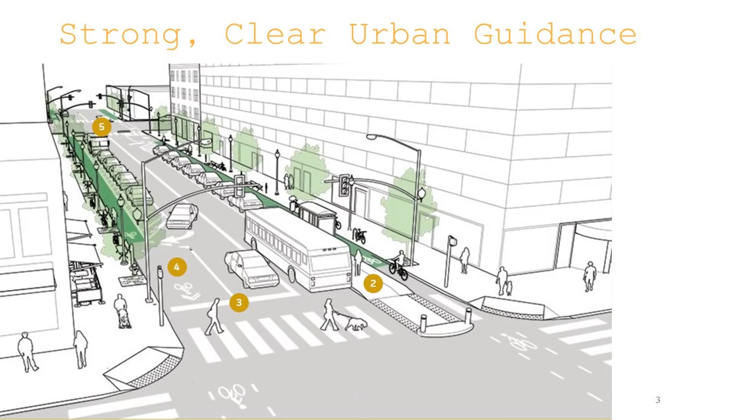You heard Steve mention that part of the focus of this guide was looking at guidance for places that aren't as well covered in some of the other guides you have available. For example, the NACTO guide provides really fantastic guidance for urban places and central cities with density and a big mix of things, but guidance for more suburban kinds of places is harder to find.

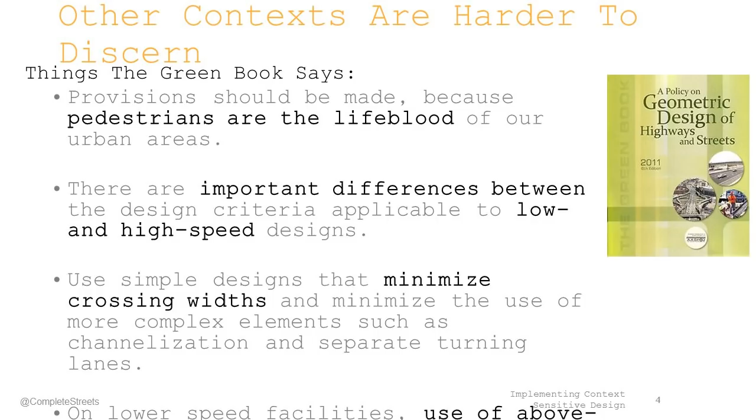There's really good stuff in the AASHTO Green Book if you know where to look for it. The problem is that book is really big and thick, and finding those gems you can use in more suburban places is difficult for people who don't spend a lot of time with their heads in that book. This is important because these suburban places make up big parts even of our central cities.

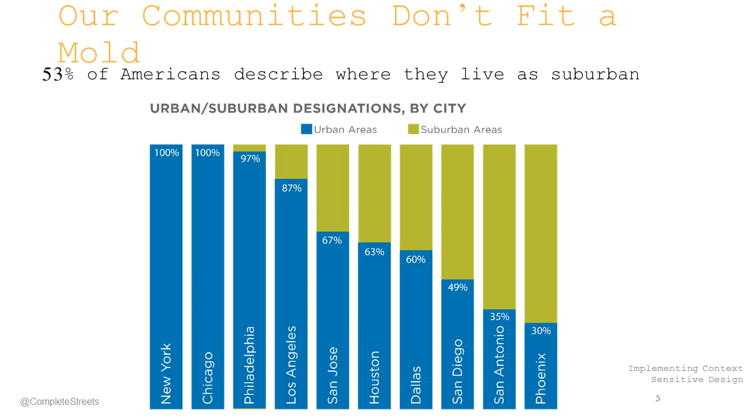This is a list of cities and how people in those cities actually describe the area where they live. You see places like Houston, Dallas, or San Diego, big cities where 30 to 50% is made up of places people describe as suburban, with basically suburban form. Even in a very urban place like Los Angeles, where I live, you can see a lot of the greens representing those suburban forms that are part of what even planners in cities are working with.

Part of what we did in the manual is break down the design process into two basic phases. If you take these basic design steps, the first activities are really pre-design activities, and we felt it was important to pull these out because many of you in design know that decisions made up front drive a lot of what occurs at the end. Oftentimes people aren't as engaged in these pre-design phases, but this really does make a big difference in how things turn out.

So we did spend some time talking about those pre-design activities and the things that were important to think through.

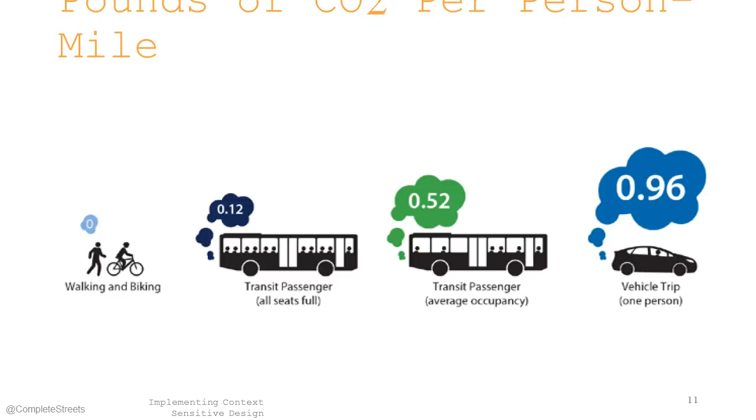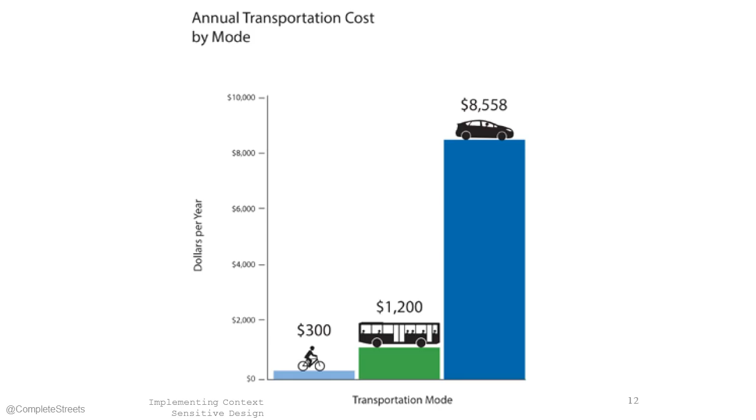Some of the things we know are important for cities, like greenhouse gases and air quality, are largely impacted by transportation decisions. The costs individuals incur isn't always the thing we're looking at—sometimes we just look at the public cost of a project—but the cost to individuals is an important consideration that should be part of the pre-planning phases of projects.

The recognition that the mere act of building roadways is going to induce travel and cause downstream impacts is important. We know that planning without considering those things has gotten us the exact opposite of what we said we wanted: more vehicle miles of travel, longer commute times, less transit ridership—generally the opposite of what most communities say they want to achieve with transportation. We also have health impacts from less active lifestyles.

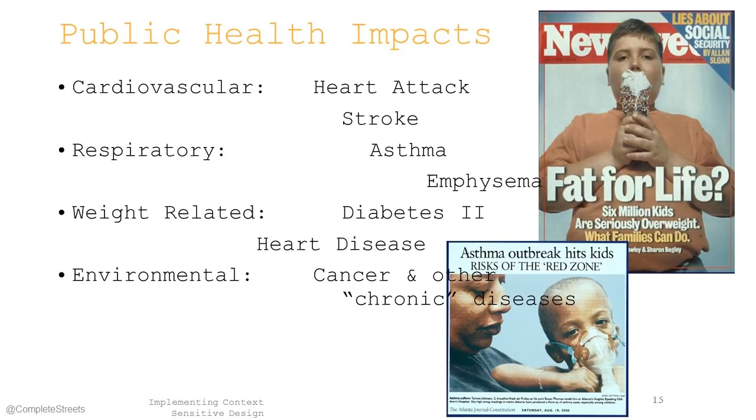We wanted to go into some of those pre-design decisions that affect those outcomes and should have a wider group of engagement. One of those is the assumed traffic growth rate. It's pretty common to just say, let's assume car traffic will grow 1% or 2%, but sometimes that doesn't match up to what's really been happening.

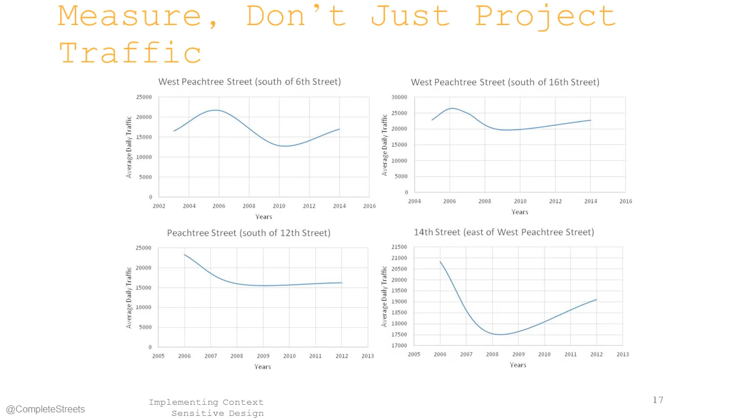So having a bit of a backwards look to check that forward look can be important. This is magnified depending on what sort of planning horizon you look at. If you assume some traffic growth rate and do it over a 20 or even 30-year period, you get that magical compound interest effect.

The idea that a small growth rate compounded over a long period of time ends up doubling your traffic over a 20-year period, effectively precluding anything that's not automobile-based in terms of decision making, which isn't the flexibility that most cities are looking for as they talk about trade-offs and how they use space.

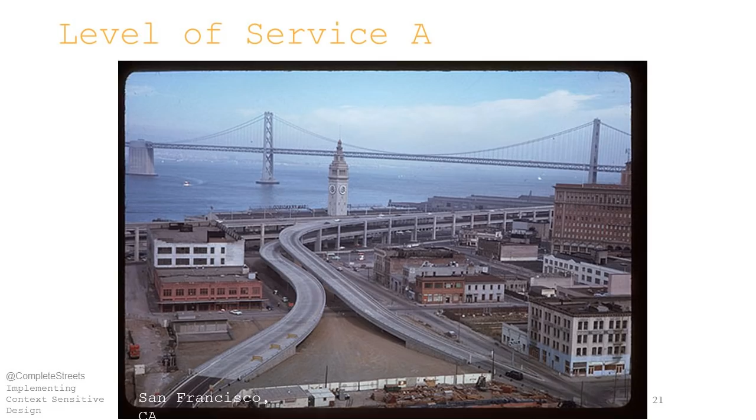And then finally, spending some time talking about what success for a community would look like. Focusing solely on traffic level of service, as we've done for a lot of time, a diagram like this may please the traffic engineers who want this level of service A, but the same street at level of service F actually represents a real success for economic development and probably urban design and lots of other measures.

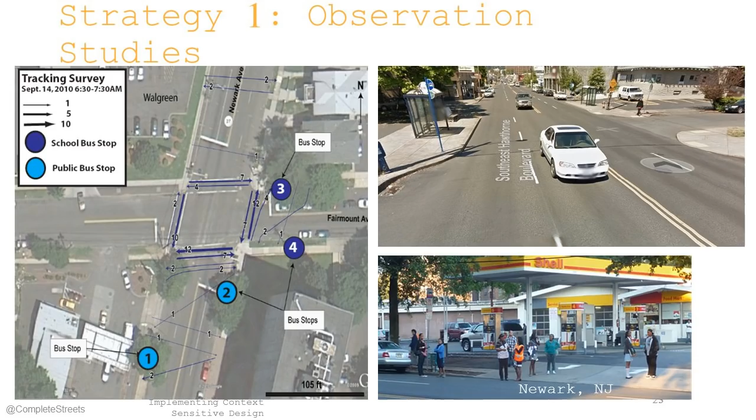A couple of the strategies we talk about in the guide. One is actually getting out and taking a look at what you're looking at. This is a bus stop study in New Jersey, and the data didn't really tell you what the issues people were talking about here. The bottom right, you can actually see what part of the problem with this location was, which was you were asking people to stand and wait for the bus in a gas station parking lot. So some things don't pop from the numbers. Some things have to be observed.

Another strategy is actually letting your data cross-check. A lot of Vision Zero programs do a really great job of taking data that we have plenty of in most places, crash data, and cross-checking with other social factors like poverty and transit ridership and things we know are interrelated. Using that data to cross-check can help daylight a lot of community goals and potentially drive towards different solutions than just singularly focused automobile metrics can.

And then lastly, thinking a little bit longer term—this is becoming even more important as technology is changing most of what we do—but thinking about who we're planning for, whether that's an aging population or a younger population whose behaviors are different than what we've seen in the past, such as the lower rates of driver's licensing among younger people. Being realistic about funding, just recognizing that the days of 80% federal matches are probably gone, and that we have to be smarter about infrastructure dollars to make them stretch further and manage the infrastructure we already have. And then understanding that as technology changes, we just need to be prepared and be nimble.

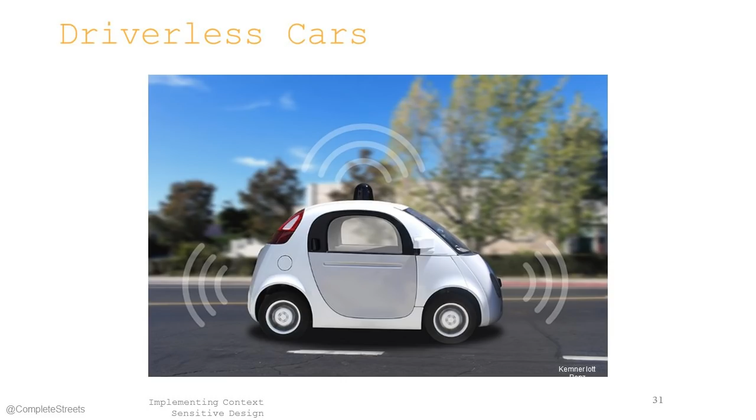We don't know exactly what's coming or when it's coming, but understanding that as people more and more use their devices as a way to navigate mobility, the curb space is really going to be the new frontier, whether you're thinking about scooters or autonomous and shared vehicles that are dropping off. Having some triggers and flexibility built in around how this curb space is managed is going to be as critical for cities going forward as thinking about car movement may have been in the past.

We broke the technical chapters of the manual into areas and ideas that we felt were more in line with what practitioners were needing. So, in other words, getting a question from elected officials or a partner agency about how you're going to accommodate the new regional transit plan on your streets might be one question that you get. Or how do we deal with speeding on this road? Or a pedestrian has gotten hurt crossing this street—what can we do about it? So we tried to break these chapters up around those questions.

The first of those, as you heard Steve allude to, is around these kinds of modal networks—transit, walking, biking—and how that integrates into street design. A lot of this, as most of you probably know, is about trade-offs. There's not enough street right-of-way to do all the things that we'd like it to do, and a lot of these things actually compete with each other.

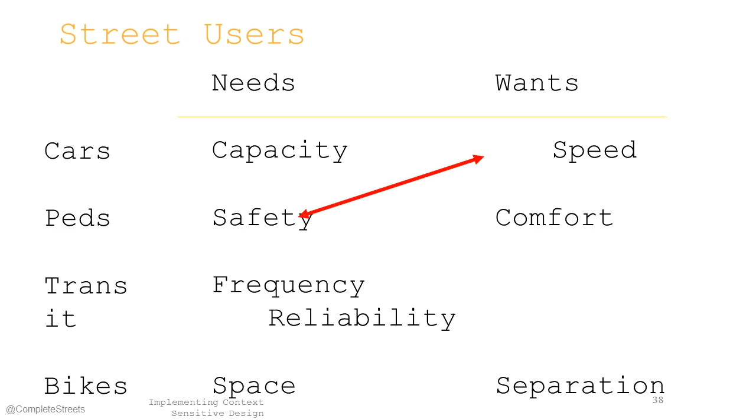There are a few primary trade-off drivers that we talked about. One is mobility function, one is modal emphasis, and one is context. I'll walk through a bit of those.

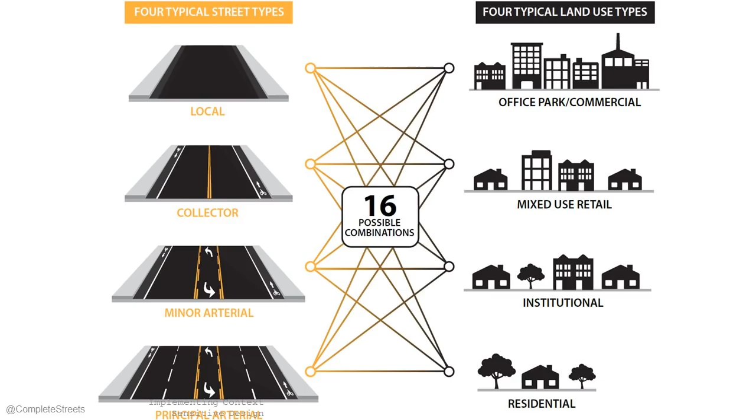The mobility function—thinking about the transportation function of the street, as you see here on the left—and the context that street is serving, this is really how you define street typologies. It's a bit broad to put it this way, but the transportation function of the street will largely drive what's happening between the curbs: how you're assigning the lanes, whether you have parking, whether you have protected bike facilities. Those are a function of the transportation systems you're trying to serve. The context—specifically the density and ground floor land use—very much drives what's happening behind the curbs. Understanding both of these is a key part of how you start to put things together.

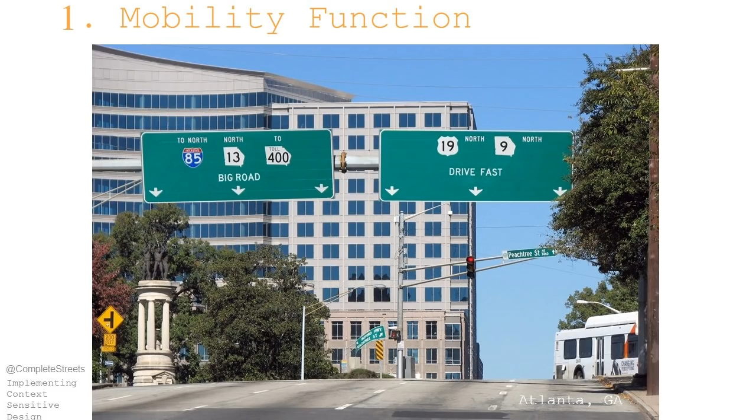Understanding that mobility function—this is a city street in Atlanta where the signs might as well tell you exactly what's supposed to happen on that street: basically, if you're not in a car, you're probably not invited. Understanding how that mobility function, and how the way we design, affects it becomes critically important.

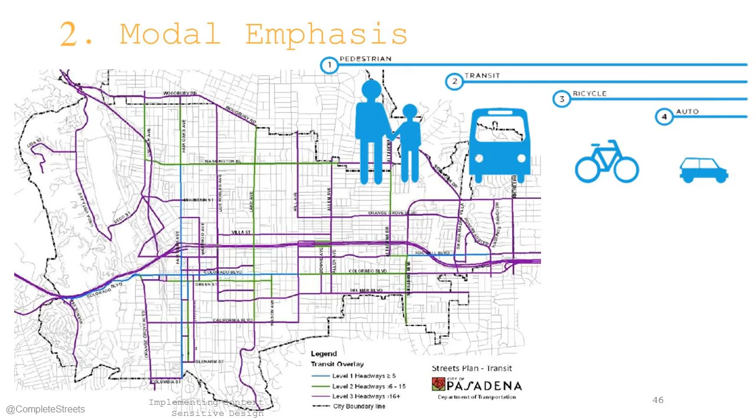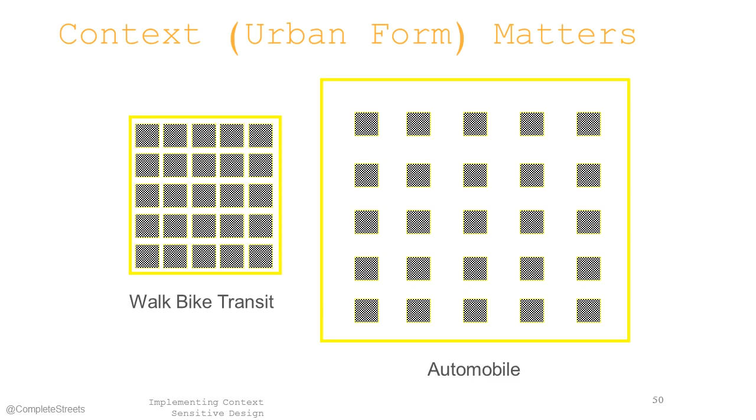Part of this is understanding the networks overlaying your systems—if you have a bike network, a priority transit network—understanding those priorities in street assignments. I'll move quickly, but part of this is understanding what makes each system work. For transit: convenience, safety and comfort, reliability, basic density and urban form, and first mile, last mile. Understanding how those pieces fit into the trade-offs when you have a transit priority street is important.

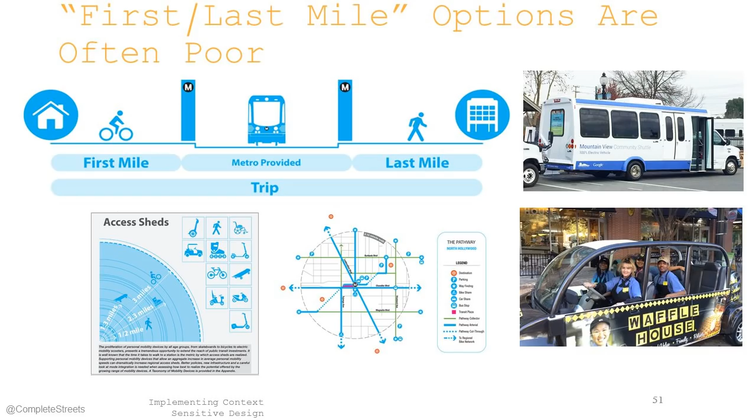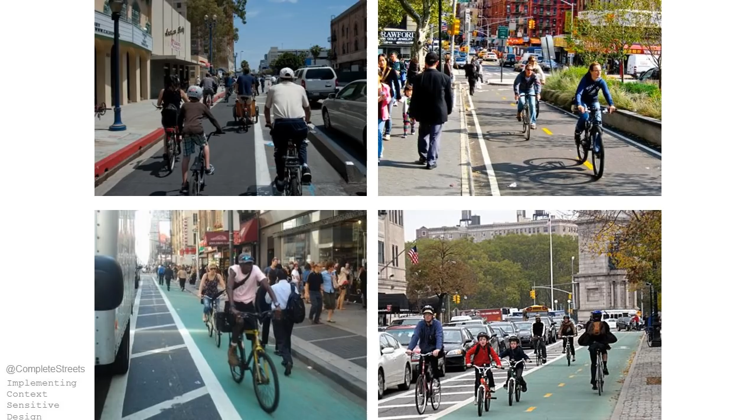Likewise with biking systems, we know this guy will ride a bike almost no matter what, but how we get the rest of these folks to ride bikes is often critical when a street is a priority for cyclists. Understanding comfort, behaviors and markets—knowing that a large group of people interested in riding bikes will look for designs that are much more protected and separated from traffic—is key in weighing the trade-offs when thinking about how these systems work together.

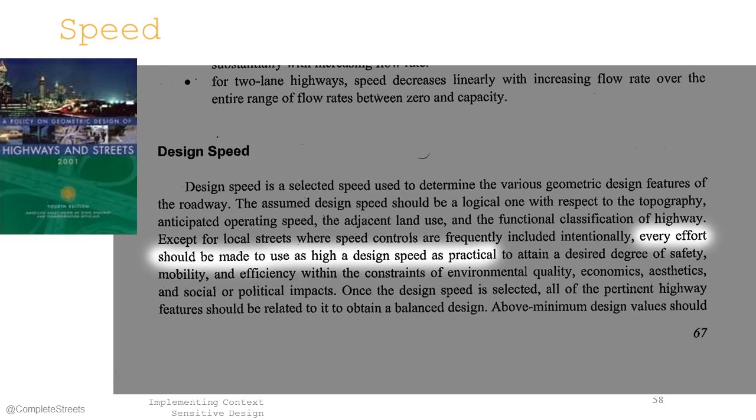The manual tries to go through how some of those trade-offs work, identifying context and understanding how that context will change over time—so that when we have a street like this, we know our community needs support a street that serves functions beyond just moving an automobile. This is part of the case studies Steve talked about, demonstrating how these concepts are put into practice, in this case in the San Diego area.

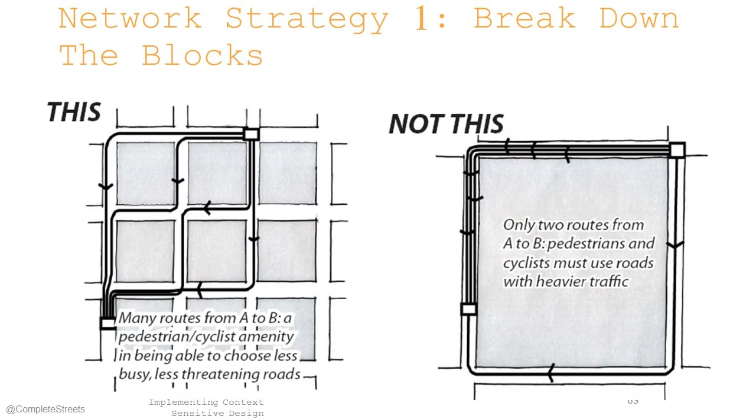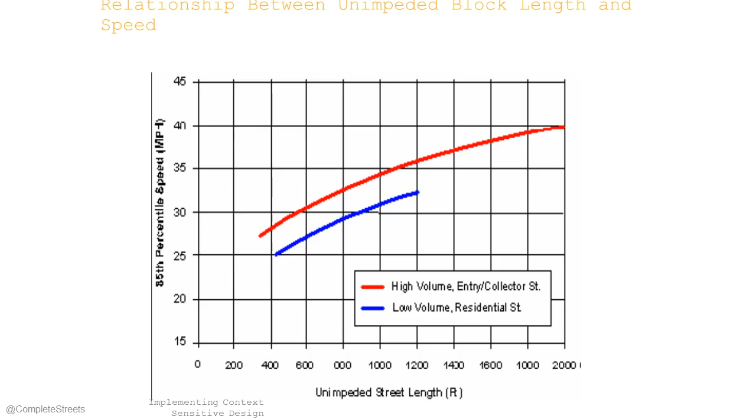We go through a few strategies for completing those flexible networks—things like breaking down superblocks and adding street network, which creates more car capacity while creating a better and more balanced system for bikes, pedestrians and buses, and reducing speeds to safe levels. Another strategy is looking for efficiency: the idea that 3-lane streets, essentially one lane moving each direction with turn lanes, actually creates more car capacity and safer crossing environments for pedestrians.

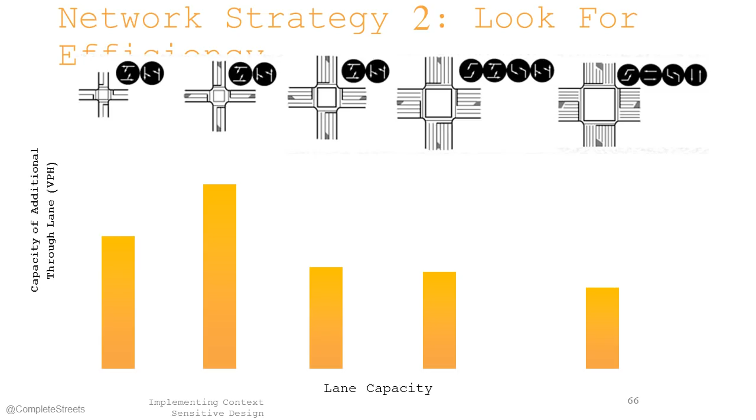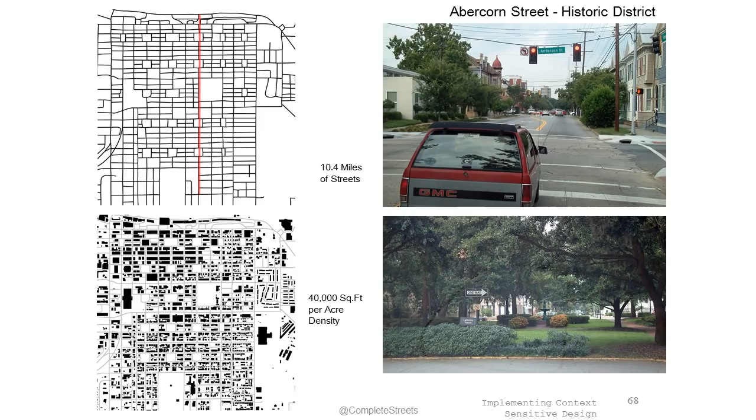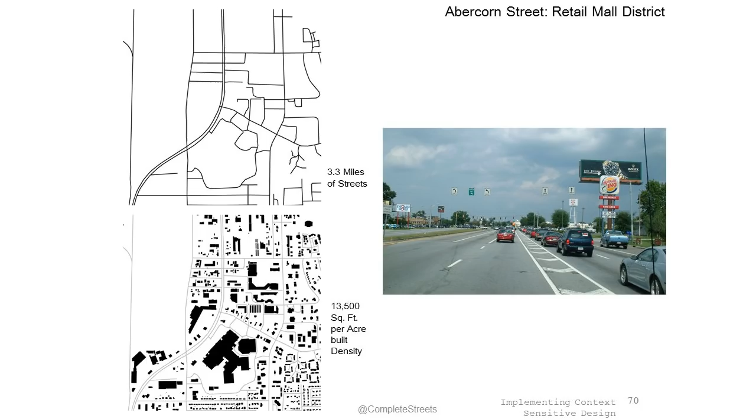We talk about the actual carrying capacity of networks. This is Abercorn Street in Savannah—downtown Abercorn is a 2-lane street that supports about 40,000 square feet per acre of density. As you move down and the street gets widened and widened, you end up with a 7-lane street supporting about a third of the built density, because the network has fallen apart and is so much less dense. Building in those networks is a big part of supporting multimodal systems.

The second technical section talks about safety and walkability tools and processes. So if you get that question about a pedestrian that's been hit and what kinds of tools you have, this section talks about that. It's important in all of these.

Sorry, this is not advancing. Sorry about that—I'm having a little technical difficulty advancing the slides. Let me see if I can try it a different way.

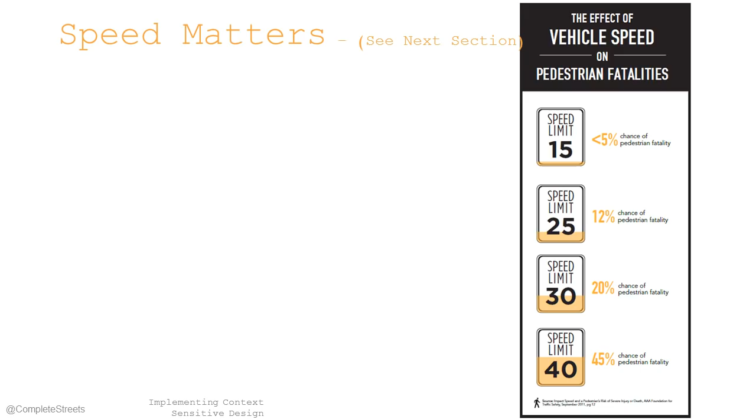Understanding speed is a really critical part of safety. A lot of you have probably seen some version of this slide, but as a pedestrian, your chances of surviving impact with a vehicle when that vehicle is going above 25 or 30 miles per hour goes down dramatically. Eric Dumbaugh did a lot of research on the idea that narrower lanes and cues that give drivers information tend to make them slow down and tend to reduce crashes.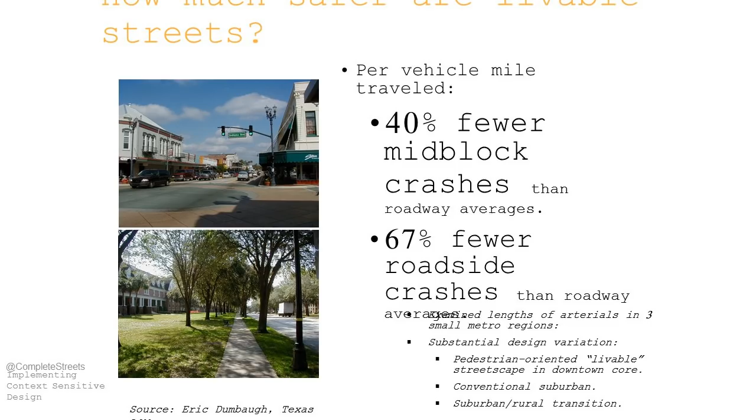This is different than the way people used to think. People used to think wider and quote-unquote forgiving lanes created more safety, and what a lot of this research suggests is that narrower lanes and urban cues actually slow people down and create better safety.

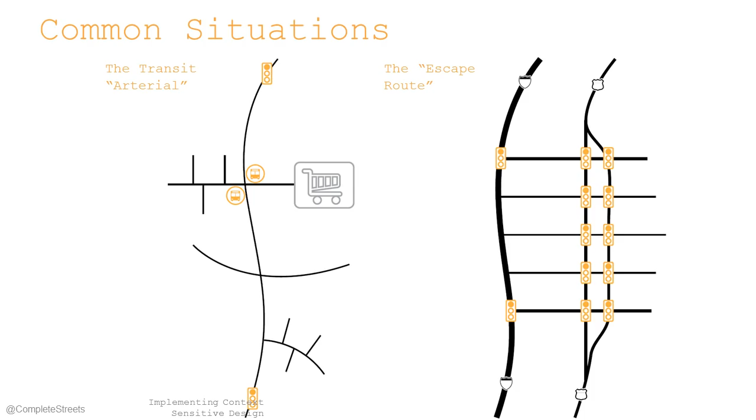We talk about some common situations, the arterial transit corridor. You see this in a lot of edge suburban places where your really high transit ridership corridors tend to be on these state routes with long signal spacing and high vehicle speeds and really unsafe pedestrian crossing conditions. On the right you see the escape route, the idea that you often have these sort of downtown grids, but there's this bigger arterial on the edge that's maybe a one-way arterial that people are using almost like a freeway to get in and out of the city, creating unsafe crossing environments.

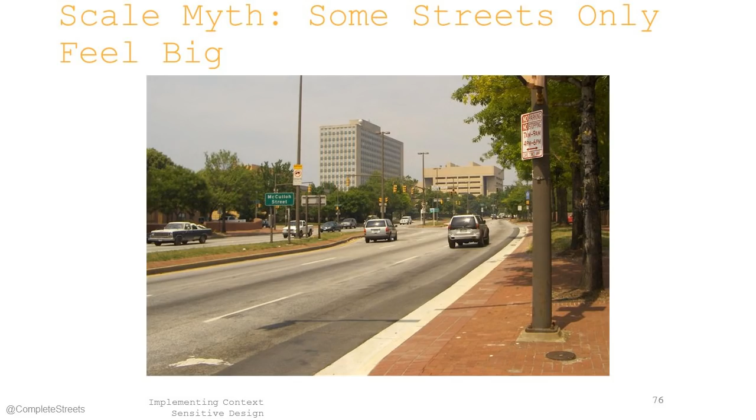This is MLK Boulevard in Baltimore. That's one of those escape route kinds of streets, and it's perceived as a really unsafe, really overbuilt street. You can see some of the reasons: there's no crossing opportunities, it's out of scale.

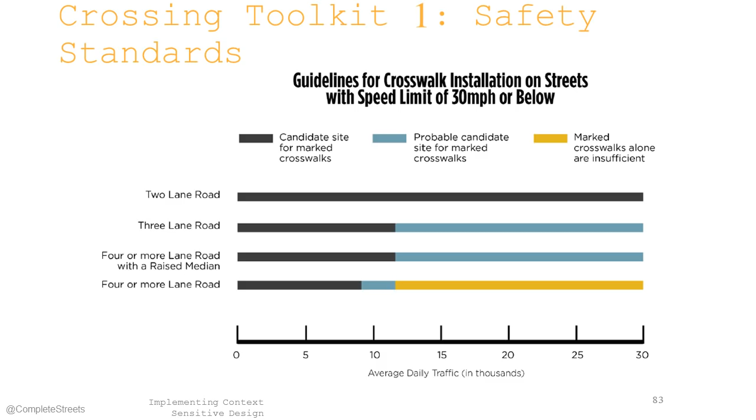Among the toolkit items we have for pedestrian safety are some notions of when you would need actual active crosswalks, something like a signalized crosswalk as opposed to just painting a crosswalk, as a function of volume and vehicle speeds and number of lanes crossed.

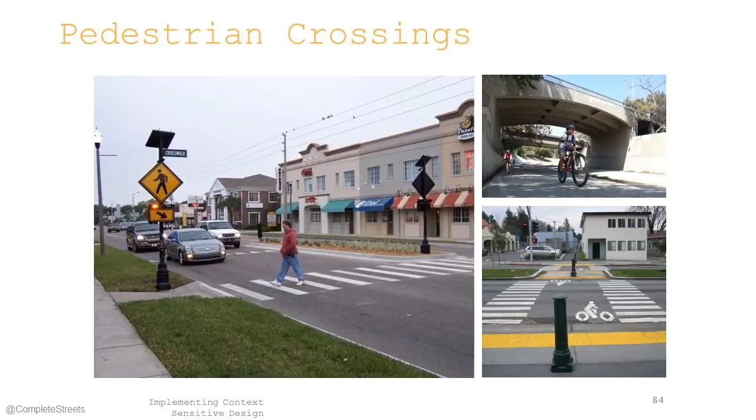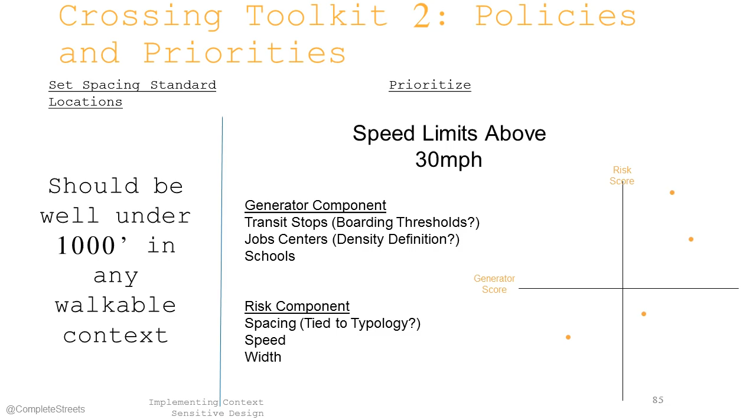We talk about the kinds of tools you can use for these crossings in these different contexts. We have some discussion about setting priorities for when you would look at putting in protected pedestrian crossings, based on the number of people you expect to use it and the type of risk that's involved. And then we also talk about some of the obstacles, the traffic signal warrants that are often used as an obstacle for putting in protected pedestrian crossings.

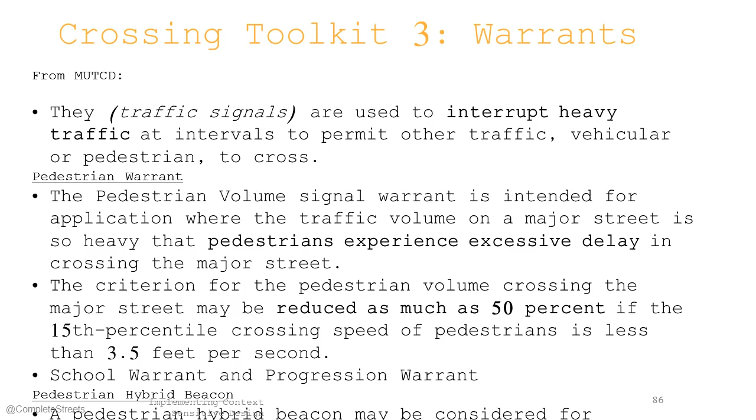The last technical section is this idea of speed management. There's this myth that was created that because freeways in their early days particularly moved a lot of cars over greater distances, freeways are efficient, but we know they're only good at certain things. They break down a couple of times a day, and when things gather at the interchanges, that doesn't work as well.

They also haven't done a great job reducing congestion. The places that have built more freeways have had more congestion. So one of the things that we try to do is really separate the notion of speed and capacity.

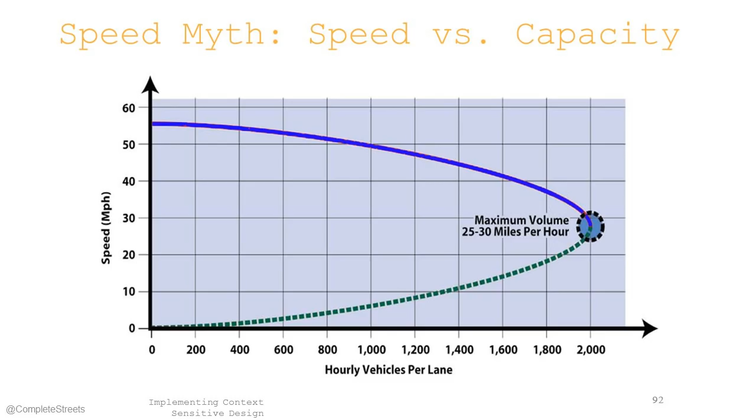They're two different things, and as we talked about previously, lower speeds can be safe for mixed modal environments and can still move a lot of capacity. There's a lot of good guidance for how you reduce speed on neighborhood streets. This is from NACTO, and lots of cities have traffic calming programs that are great for local neighborhood streets or maybe even sometimes collector streets. But on the arterial streets, it's tougher to find guidance. A lot of these tools aren't the right tools for bigger arterial streets.

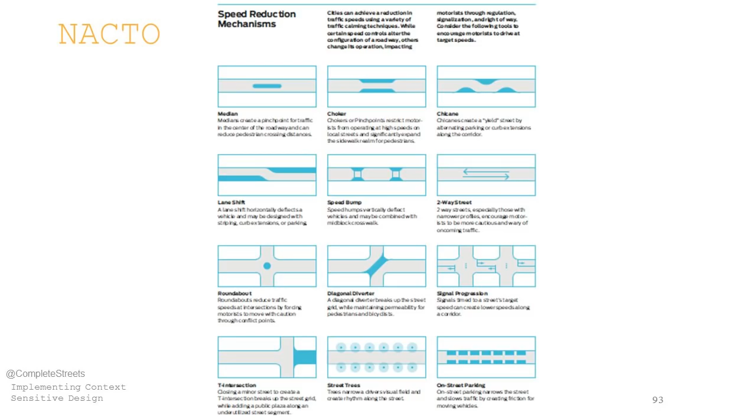So part of what's important to understand is that the flexibility we have around lane widths or number of lanes is perfectly fine and reasonable to employ. All of the cars fit within any of the acceptable ranges of lanes, and so we do have flexibility in how we design bigger streets.

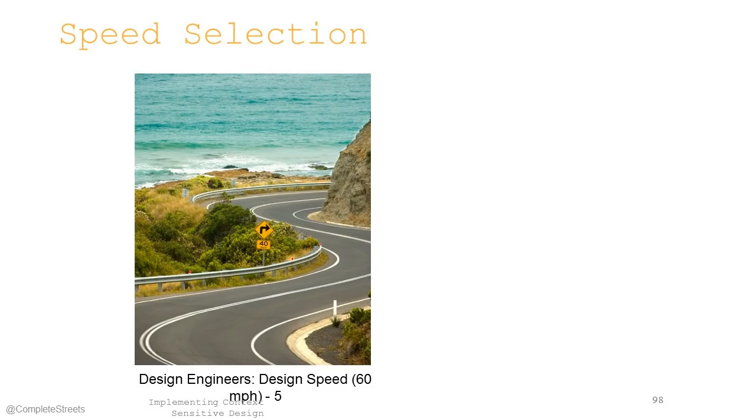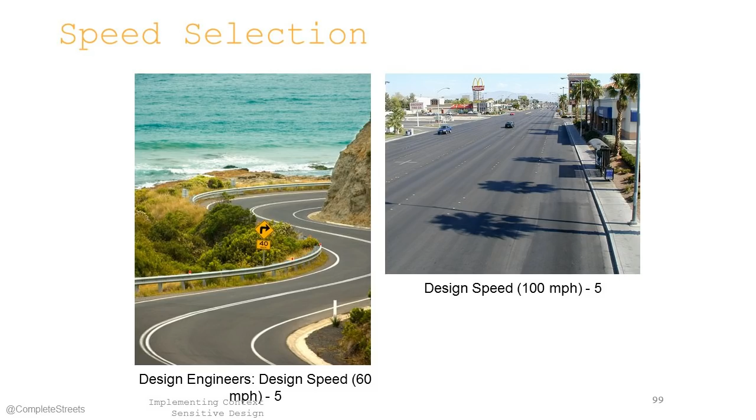So we get into a bit of what makes drivers slow down on arterials. If you look at the Green Book, it suggests that you control driver speed through horizontal and vertical curvature, which is great if you're designing a street like this. You can put all the curvature in that you need to get people to choose the speed you want. But if this is the street that you're designing, that's sort of a limitless design speed — as fast as you can go is what that design speed is. And that, on the right, is a lot of what we work with in cities.

Enforcement will probably only get you so far. So really thinking about how people make speed decisions becomes really important. And this is what people do in an instant — they do a risk-reward analysis in their brain.

The risks are looking at the type of street. They think about the weather. They think about whether pedestrians or bikes are likely to be here. They process how much of their environment they can see based on trees or buildings that constrain their view shed. And they make a decision that's weighed against travel time — they want to get from A to B as fast as possible. We do this calculus immediately in our brains based on our built-up experience.

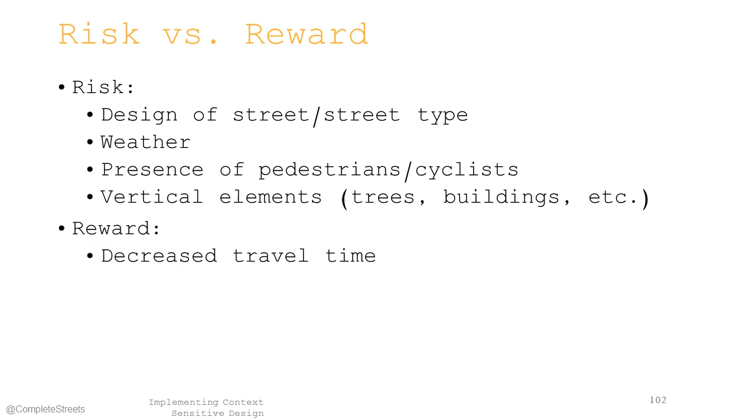One of the reasons teenagers are terrible drivers is they haven't built up this database yet to make these decisions properly. But understanding that means we can change design elements that tend to change those cues for people about those risk factors. Those factors are the number of lanes, the lane width, the edge activity, and the vertical elements.

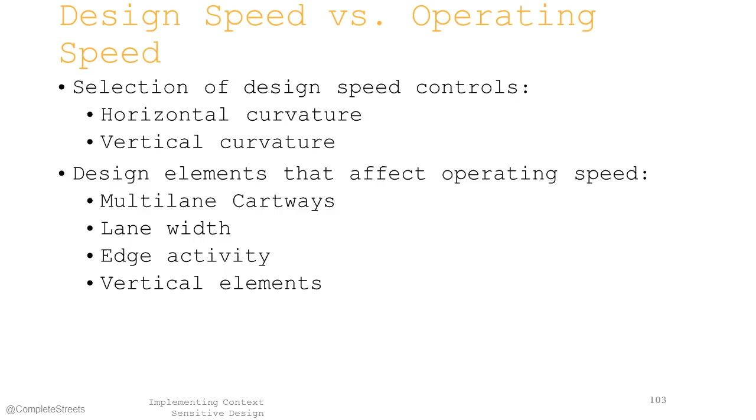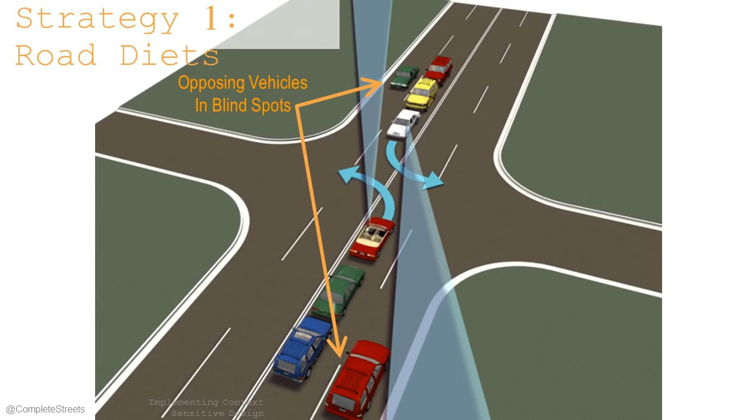So in terms of number of lanes, a lot of you have probably seen this — on 4-lane streets, basically the most aggressive driver can weave in and out of traffic and really set the speed on the street. When you reduce that to a 3-lane street, not only do you create a safer environment in terms of visibility, but the most conservative, slowest driver is really setting the speed for the street.

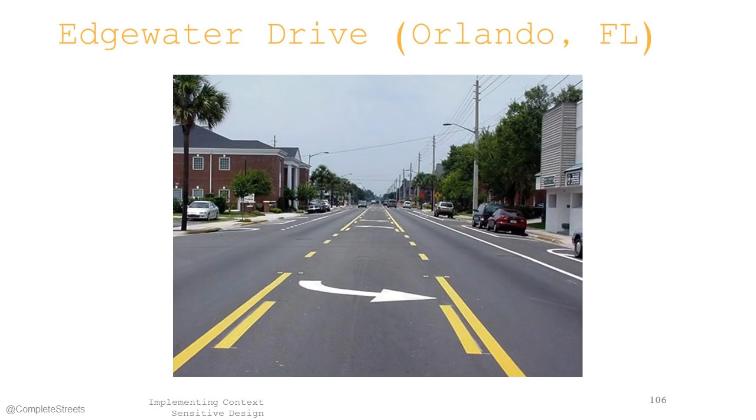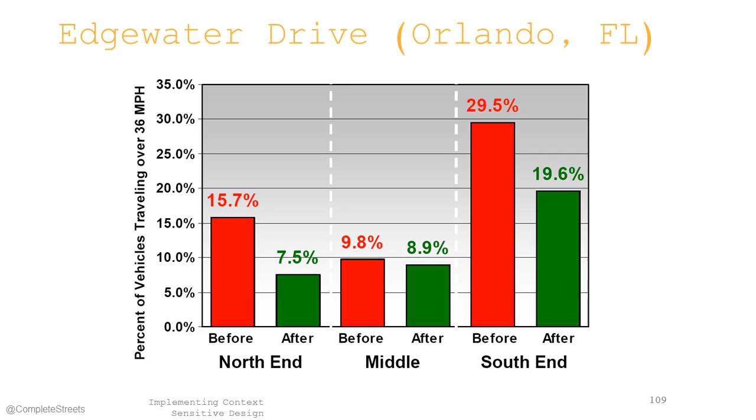And when they've done before and after studies — this is Edgewater Drive in Orlando — they've seen reduced crashes on these streets, reduced injuries, and reduced speeds before and after. So really reducing streets to 1 lane moving in each direction has a tremendous impact on reduction in speed and on safety.

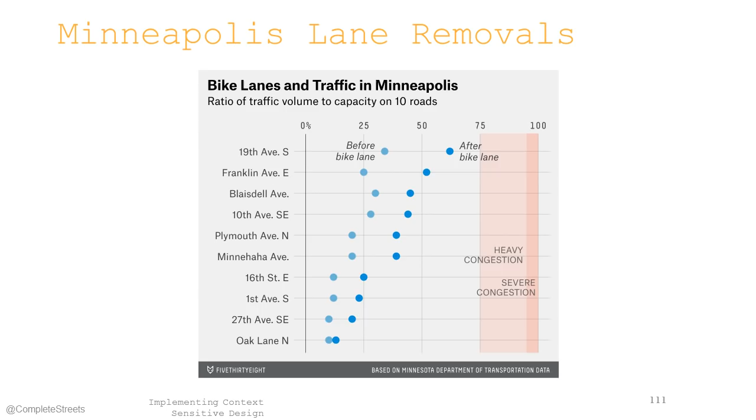Getting these to work, the data that's emerging suggests that they really work best when the trade-off of vehicle capacity is not severe. So this is a lane reassignment in Minneapolis, and in the 75 to 100 range, you see the heavy congestion and severe congestion kind of areas in terms of the volume capacity ratio. If the change that you're making adds congestion but doesn't put it into those pink and red zones, those are the projects in most places that tend to stick. Those trade-offs seem to be accepted by the community as good trade-offs and things that are supporting livability without a really, really big downside. We talk about lane width adjustment.

This is a pilot project in Dallas where lanes were reduced down to 10 feet, and between 2 and 7 mile per hour difference were observed.

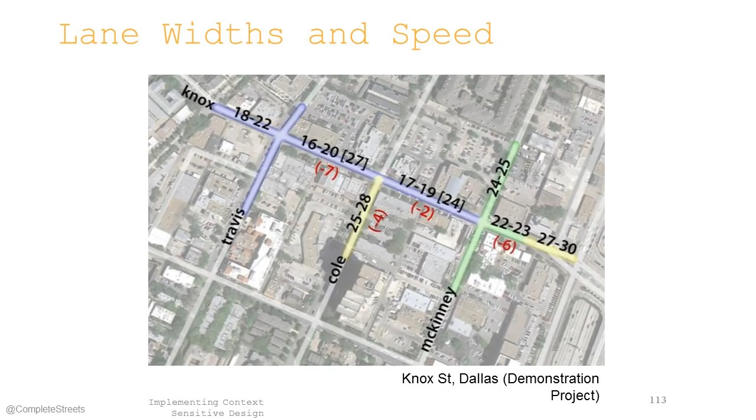Same number of lanes moving, but just reducing the lane widths reduced the speed.

Thinking about both of those strategies, it's also important to know your audience. Oftentimes these 4-to-3 road reductions result in a pair of bike lanes at the edge of the street, which is great, but may not be what every community is looking for as a primary objective. In a lot of cases it's better to emphasize the speeding and pedestrian safety aspects. You still get the bike lanes, but making sure the community understands the driver for the project becomes really important.

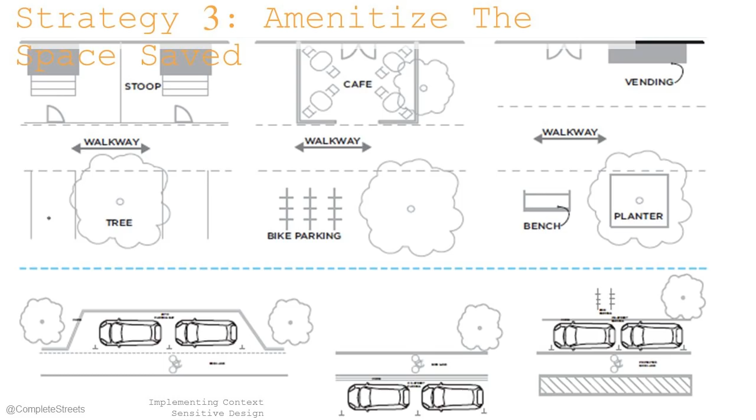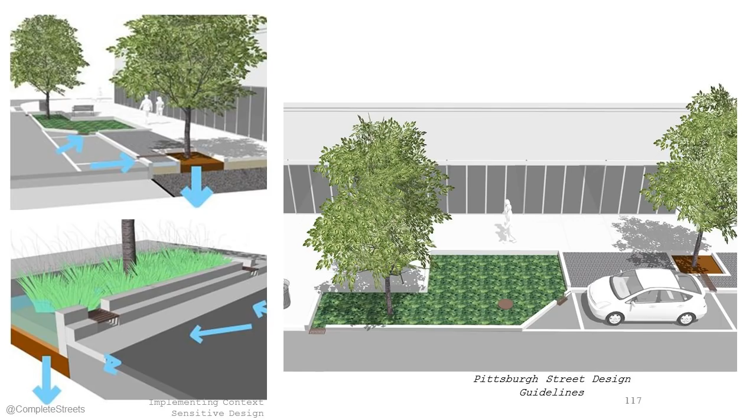Amenitizing the space that you repurpose in streets is another way for people to see the community benefits, and doing this in a smart and varied way that speaks to community goals and to things that are important in an individual place becomes a really important part of getting these projects sold and getting them to stick once they move forward. So that's a bit of what we covered in the guideline.